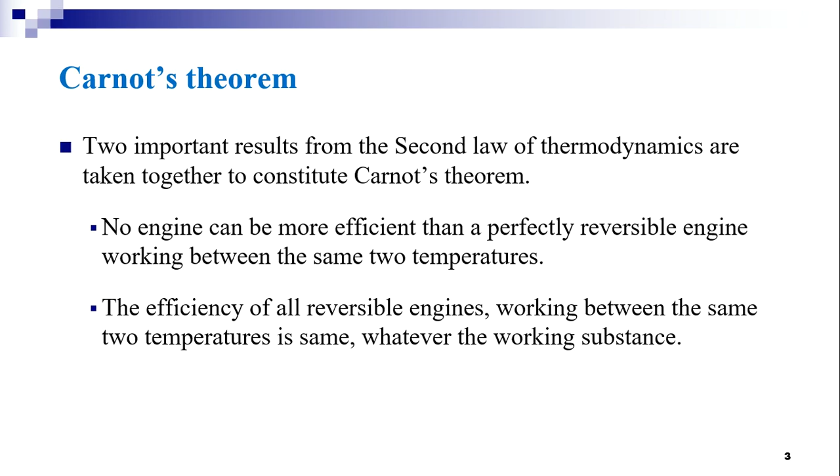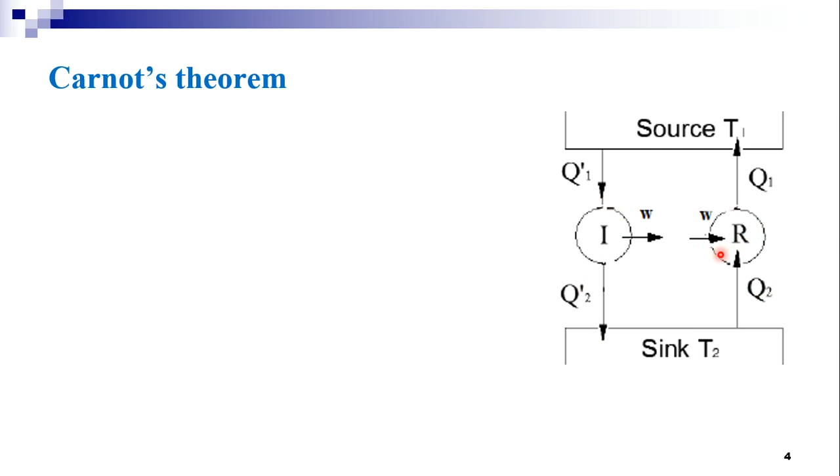To prove Carnot's theorem, let us consider two engines I and R working between the temperatures T1, which is the source temperature, and T2, the temperature of the sink, where T1 is greater than T2. Here the engine I refers to the irreversible engine and R represents the reversible engine.

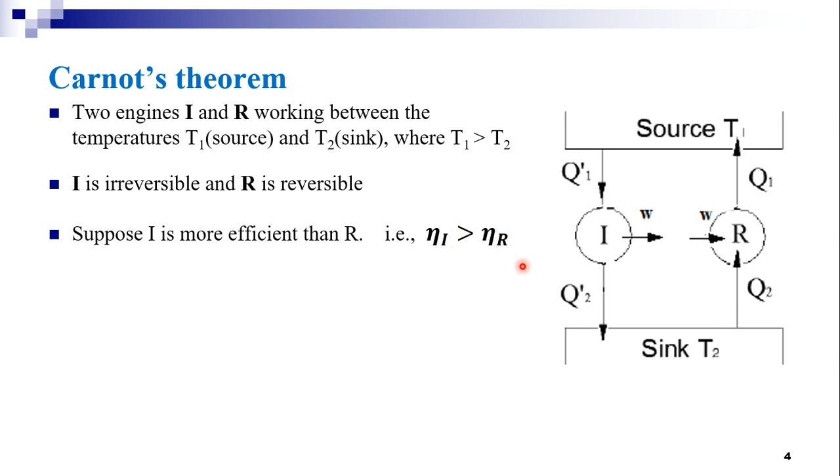Now let us suppose the engine I is more efficient than the engine R, that is, the efficiency eta I is greater than eta R. Now let us suppose that the engine R absorbs Q1 amount of heat from the source at temperature T1 and rejects Q2 amount of heat at temperature T2, and the engine I absorbs Q1 dash amount of heat from the source and rejects Q2 dash amount of heat to the sink.

According to the assumption, I is more efficient than R. Therefore, the efficiency of the irreversible engine I and the reversible engine R can be compared. The efficiency Q1 dash minus Q2 dash by Q1 dash is the efficiency of the irreversible engine I. It is greater than Q1 minus Q2 by Q1, which is the efficiency of the engine R, according to our assumption.

This expression may be written as W by Q1 dash, which is greater than W by Q1, where W is the work done, that is the difference Q1 dash minus Q2 dash, or Q1 minus Q2. So by this inequality, we get Q1 greater than Q1 dash.

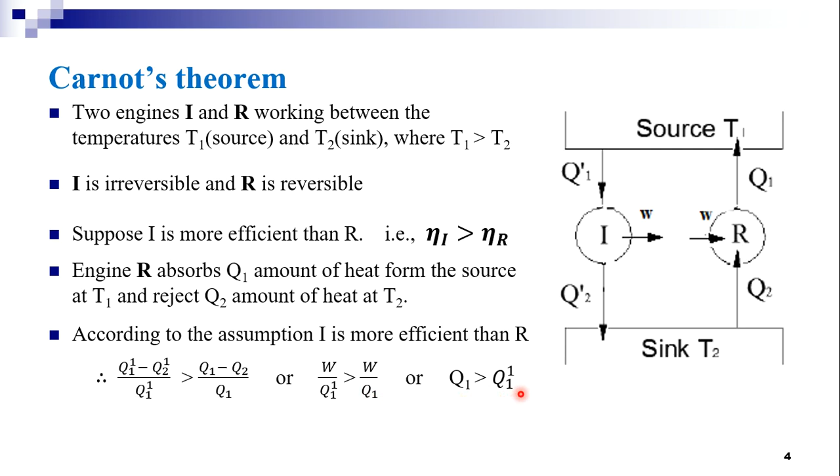Continuing this, we note that Q1 dash minus Q2 dash is equal to Q1 minus Q2, or it can be written as Q2 minus Q2 dash is equal to Q1 minus Q1 dash. Now because Q1 is greater than Q1 dash, we can write Q2 is greater than Q2 dash.

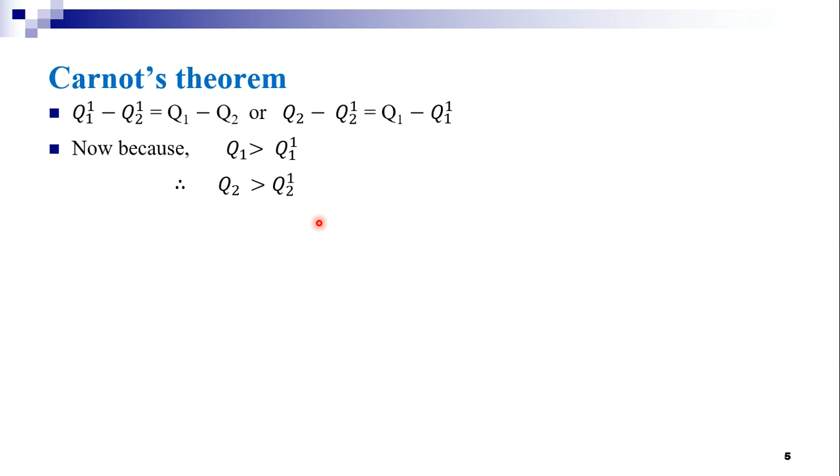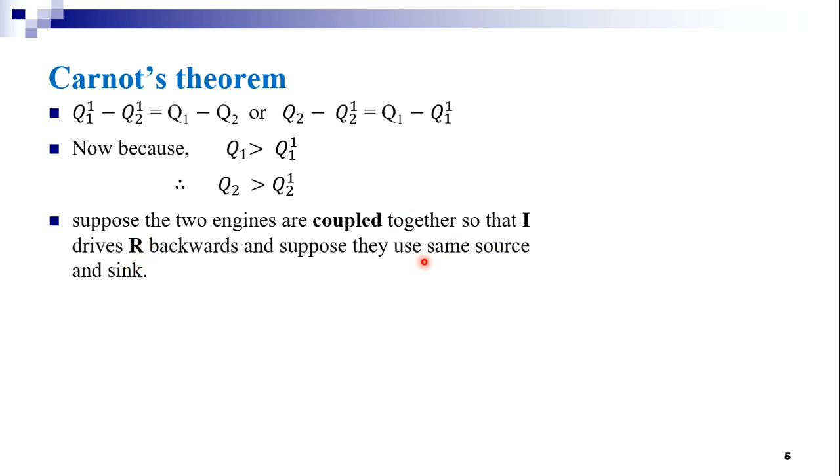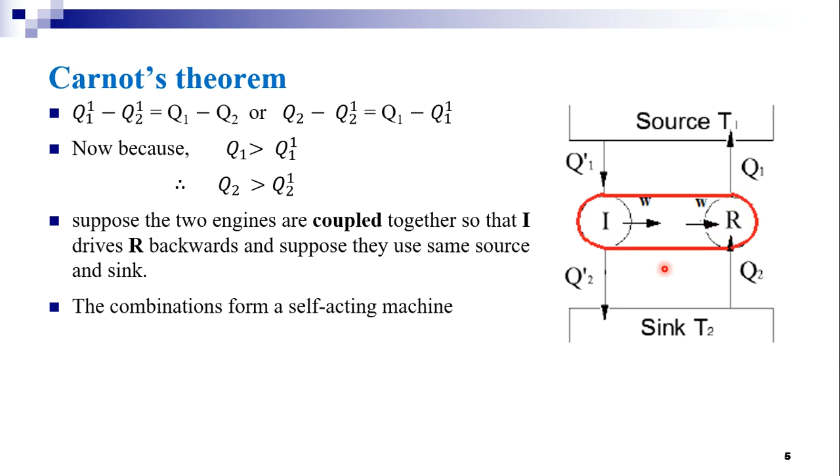Now we suppose that the two engines are coupled together, so that the engine I drives the engine R backwards, and suppose they use the same source and sink. In the figure you can observe these two engines I and R are coupled together, so that the irreversible engine I drives back the reversible engine. Since these two are coupled together, this combination acts as a self-acting machine.

Next, I absorbs Q1 dash amount of heat from the source and rejects Q2 dash amount of heat to the sink. R absorbs Q2 amount of heat from the sink and gives up Q1 amount of heat to the source. This is because R is driven by the engine I, and the external work is done automatically, so it acts as a refrigerator, and these coupled engines act as a self-acting machine. Hence the engine R can absorb heat from the sink, which is at a lower temperature, and reject the heat to the source, which is at a higher temperature.

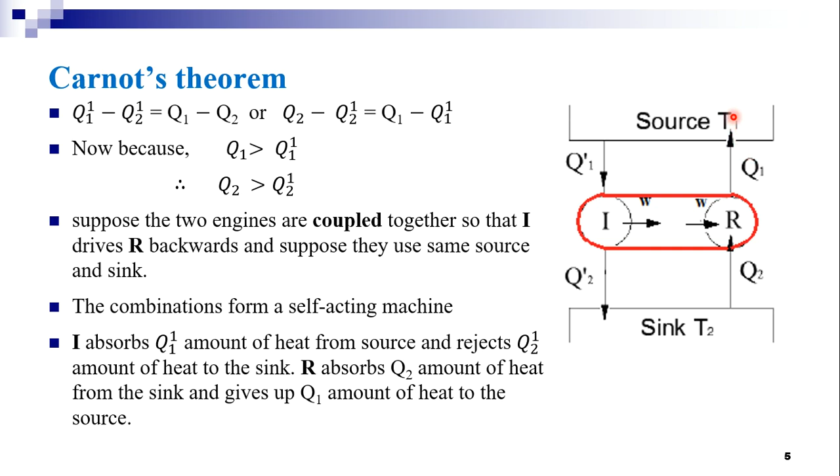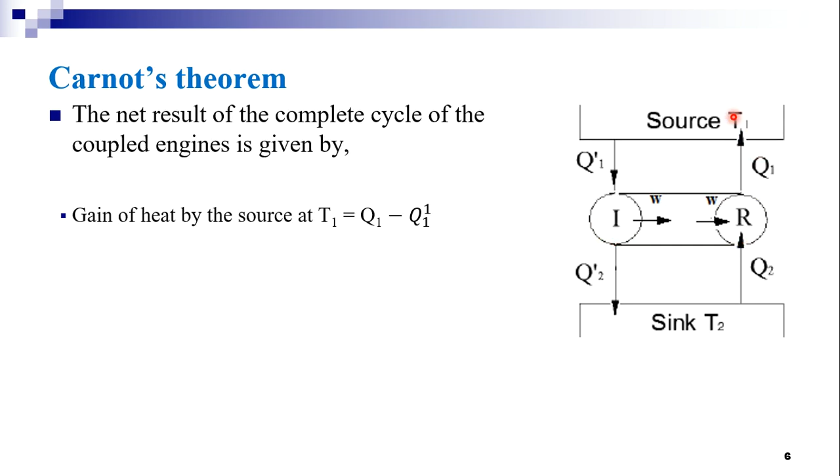The net result of the complete cycle of the coupled engines is: the gain of heat by the source at T1 is equal to Q1 minus Q1 dash, the loss of heat by the sink at temperature T2 is equal to Q2 minus Q2 dash, and the external work done on the system is equal to 0.

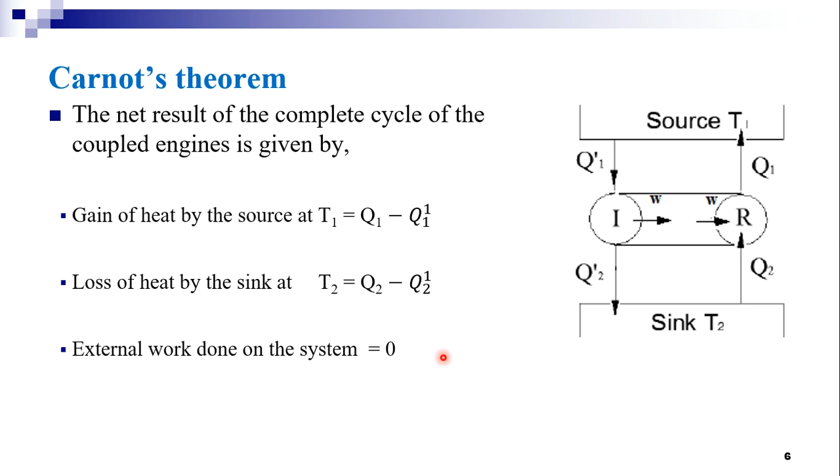Hence, the coupled engines form a self-acting machine unaided by any external agency. This means there is no necessity of any external agency for the operation of these engines, which transfer heat continuously from a body at low temperature to a body at high temperature. Hence it can be concluded that no engine can be more efficient than a perfectly reversible engine working between the same temperatures.